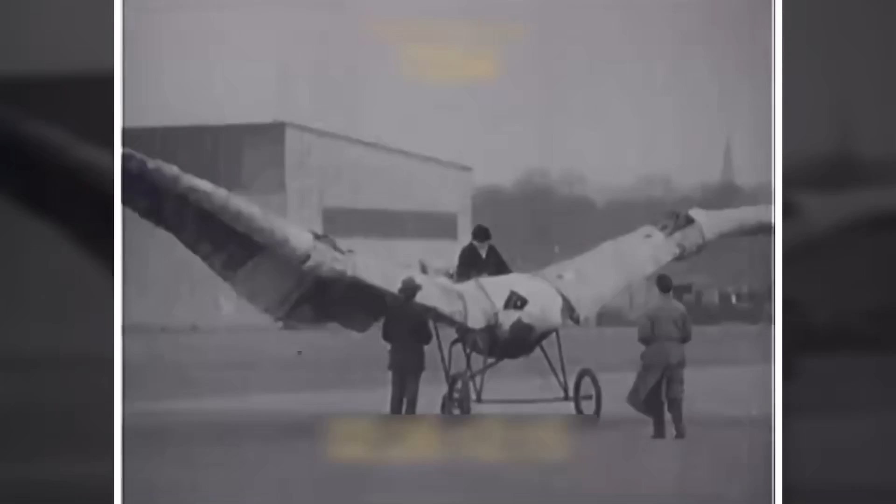However, by observing nature, specifically birds, along with many studies and a lot of trial and error in aviation, humans were able to understand exactly how something could stay in the air flying. In simple terms, airplanes fly because of the shape of their wings, the so-called wing profile. The upper part has a curvature and the lower part is less curved.

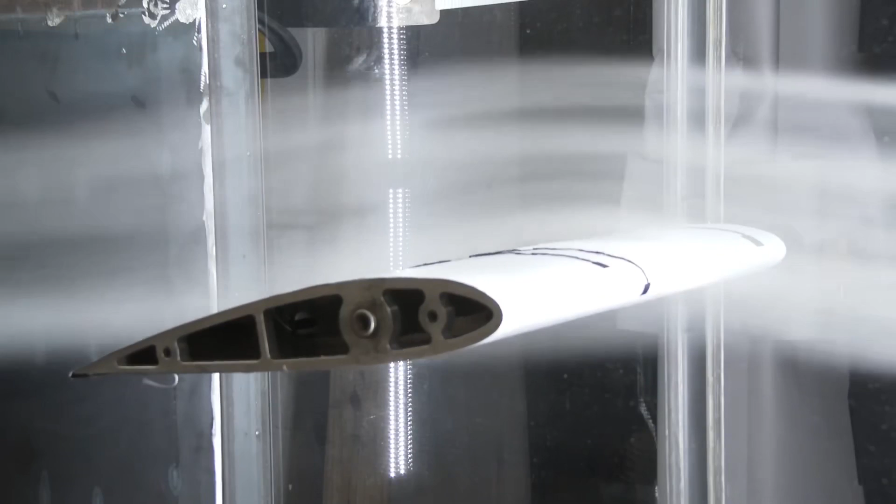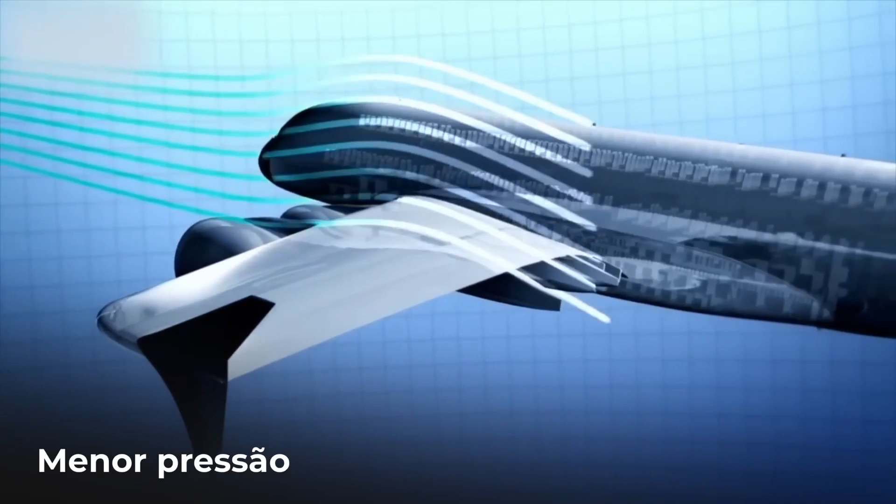This asymmetry causes the airflow over the upper part of the wing to travel a greater distance, resulting in a higher airspeed in that region. This higher speed creates a lower pressure zone on the top of the wing compared to the air passing underneath the wing, which moves at a lower speed and higher pressure. And it is precisely this difference in pressure between the upper and lower parts that results in the generation of an upward force, which pushes the wing, generating the so-called lift force, which keeps the airplane in flight.

Not only is the wing profile important, but also the angle of attack of the wing in relation to the airflow. The greater this angle, the greater the lift force the wing will produce. And the smaller this angle, the less lift force will be produced. And the third and final element that completes this equation is the speed of the airplane. Without speed, there is no way for a wing to produce lift. And that's why airplanes have engines and perform a long and fast run before taking off.

This moment allows a huge and considerable airflow to pass over the wing, producing lift while the airplane is still on the ground. You can observe this phenomenon happening during the takeoff run, since the wings of some airplanes flex slightly upward, and this effect is much more pronounced on the wings of the Boeing 787, which are made of composite material and because of that, flex considerably more at all times during flight. But why could bending be something fatal for any airplane?

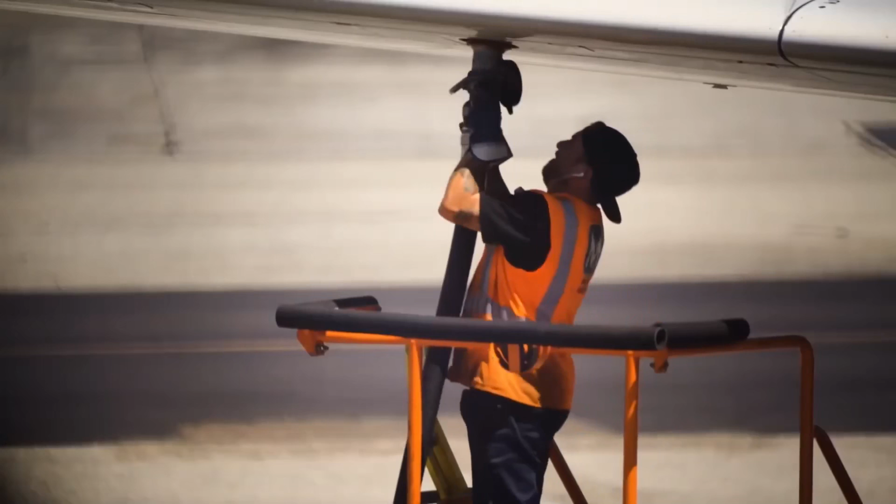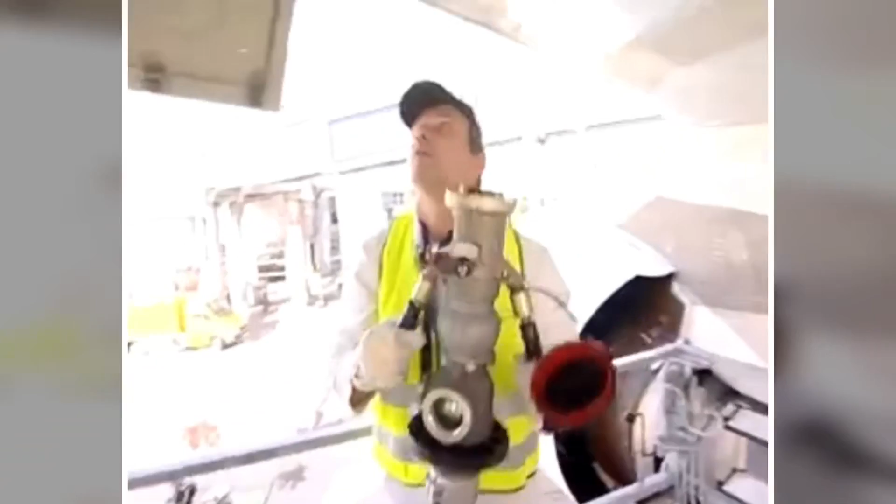Well, if you didn't know, the fuel of airplanes is stored in their wings in a principle of aerospace engineering known as a wet wing. In it, the airplane's fuel tank is integrated into the structure of the airplane's wings. In fact, the wing itself is the airplane's fuel tank. This configuration is a complex engineering choice that involves aerodynamic structure, safety, and performance. It eliminates extra fuel tanks, which would otherwise add significant weight and reduce the airplane's efficiency.

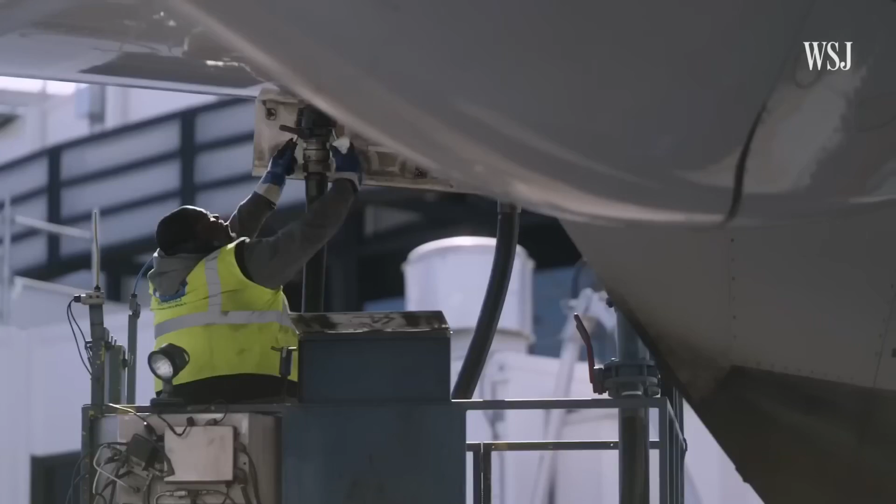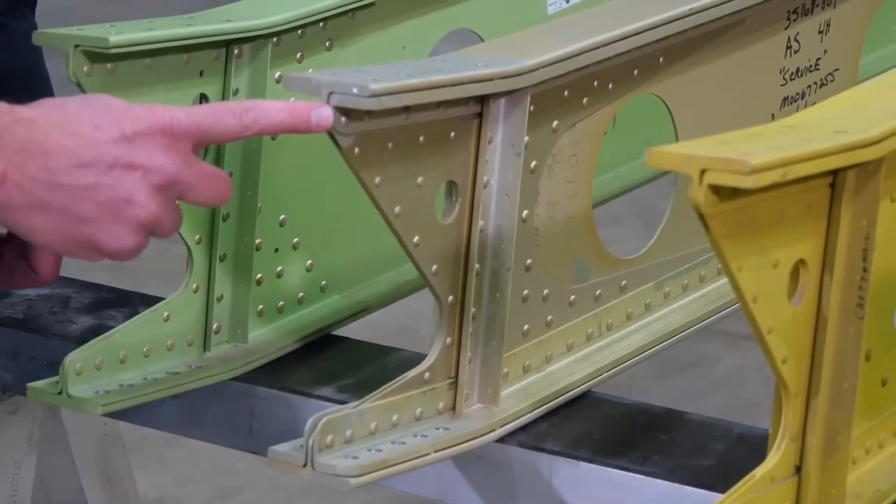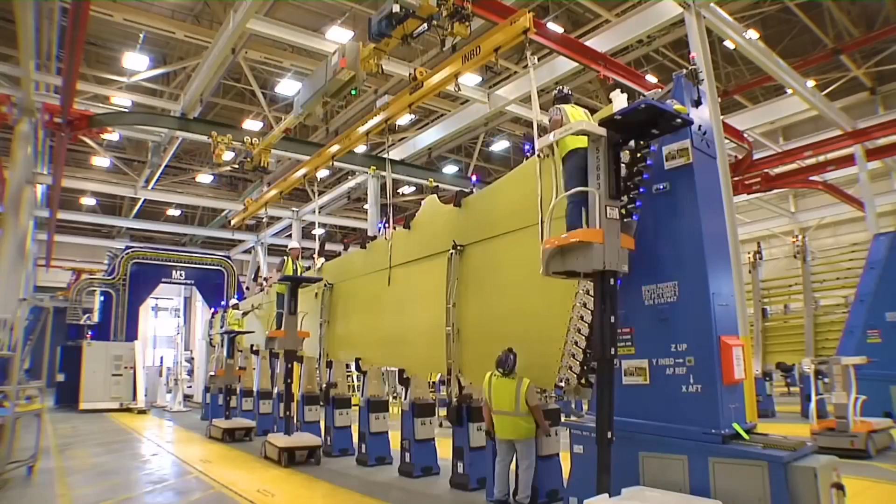By nature, airplane wings are made of two main components. The spars are the main structural elements of an airplane wing. They function like beams that extend from the root of the wing to the tip, arranged longitudinally. Their function is to receive most of the aerodynamic forces generated by the wing and transmit them to the aircraft's fuselage, being essential for supporting the flight loads and the weight of the wing.

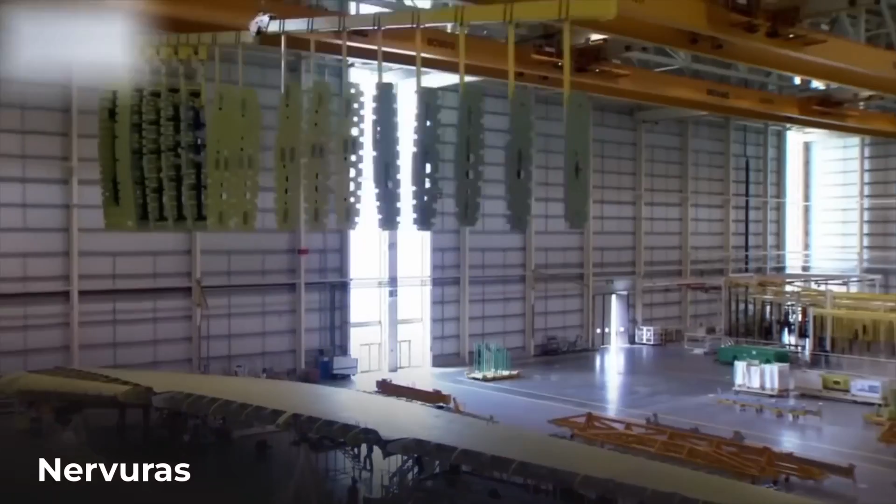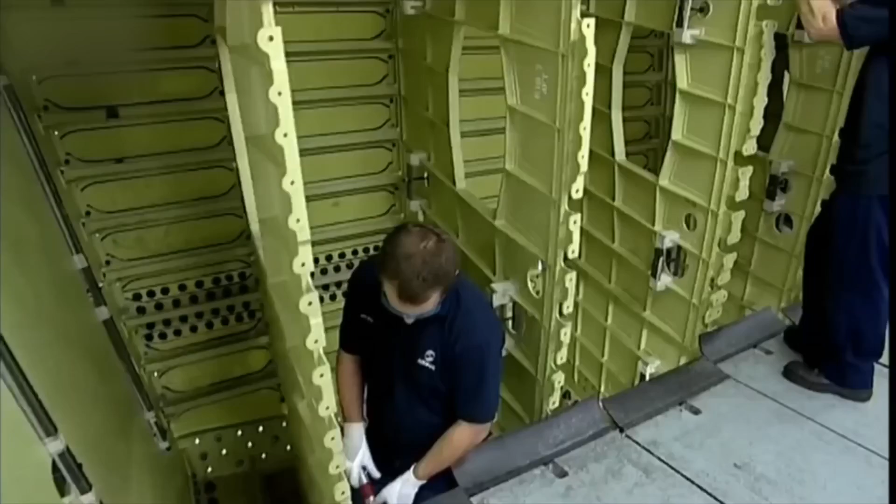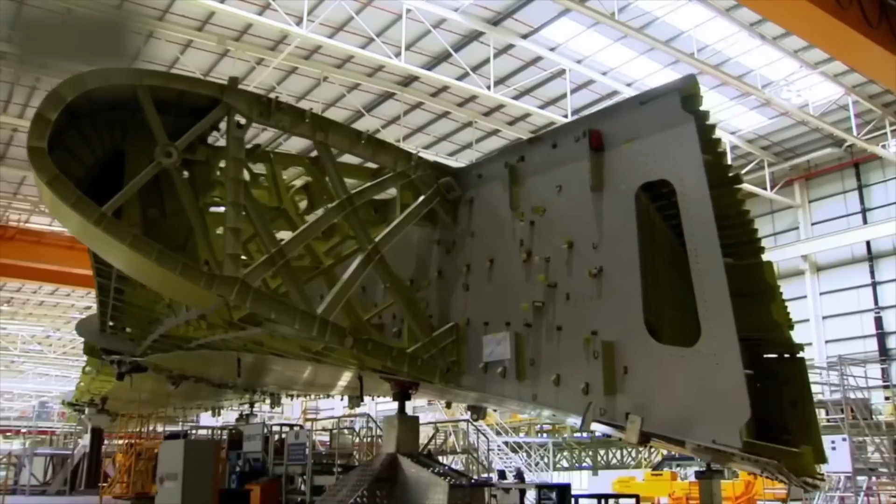And the ribs, which are transverse structural elements that transmit the loads from the wing covering to the spars, maintaining the aerodynamic profile and the shape of the wing. In other words, it's the ribs that give the wing that curved shape, which generates lift. And given the way these two components are arranged, the wing ends up being hollow by nature. Then some bright mind thought, if it's hollow, it can serve as a fuel tank. It sounds simple, but it changed the aviation industry completely.

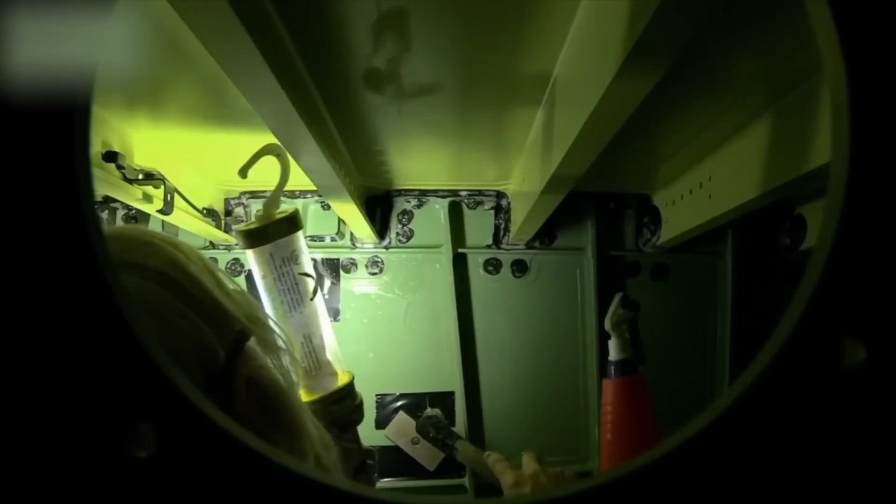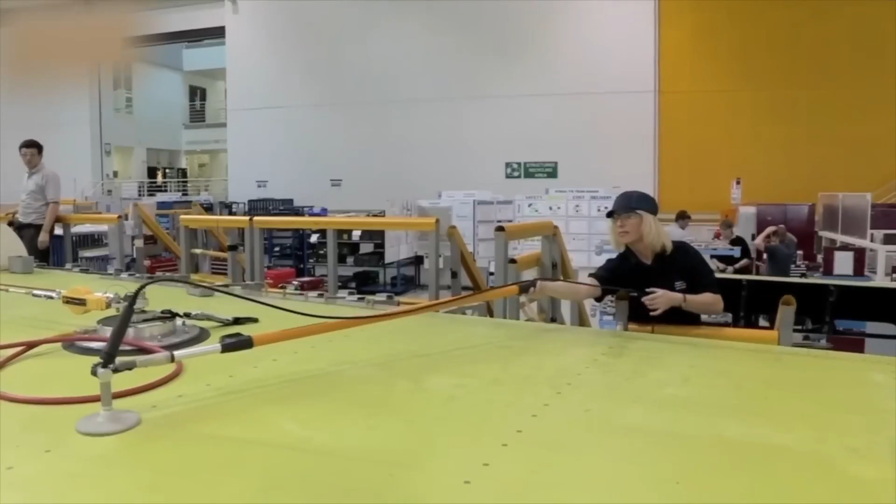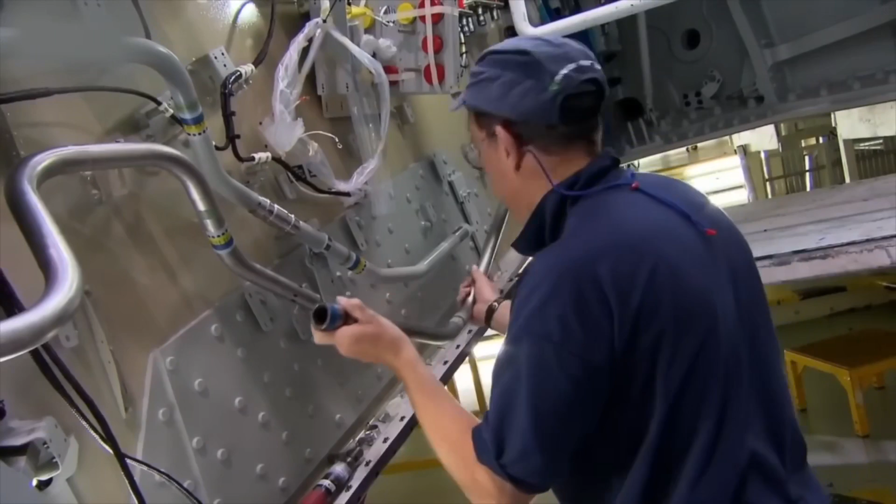And studies proved that putting fuel in the wings would improve the plane's stability. It would improve the overall structural efficiency by counterbalancing the lift generated by the wings and the weight of the fuselage. It would reduce the complexity of the aircraft's fuel system, since the fuel can reach the engine essentially by gravity. It would improve passenger safety by placing the fuel away from the passengers. But how exactly can fuel in the wings be beneficial?

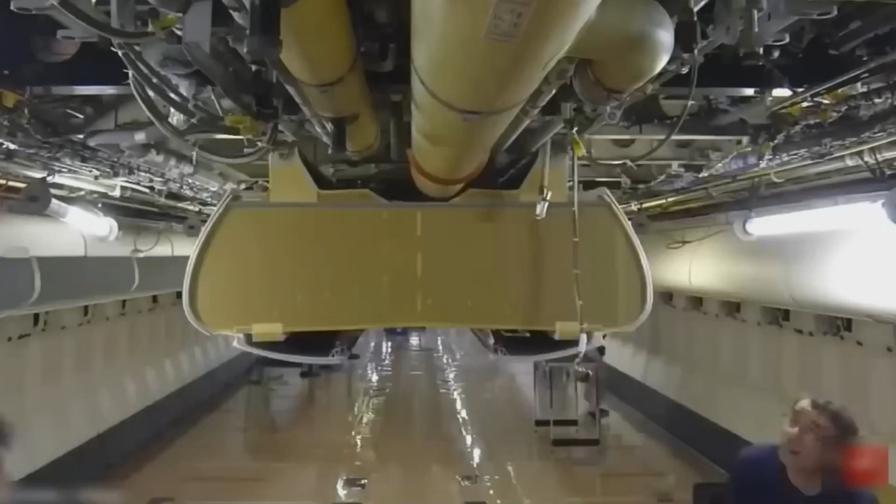The main reason airplanes carry fuel in the wings is because of weight and balance issues. All airplane cargo, including passenger weight and carry-on luggage, is carried in the fuselage. Checked baggage in the cargo hold, onboard food, and other paid cargo are also stored in the hold. This concentrates all the weight in the airplane's fuselage, creating great tension and structural stress on the wings during flight.

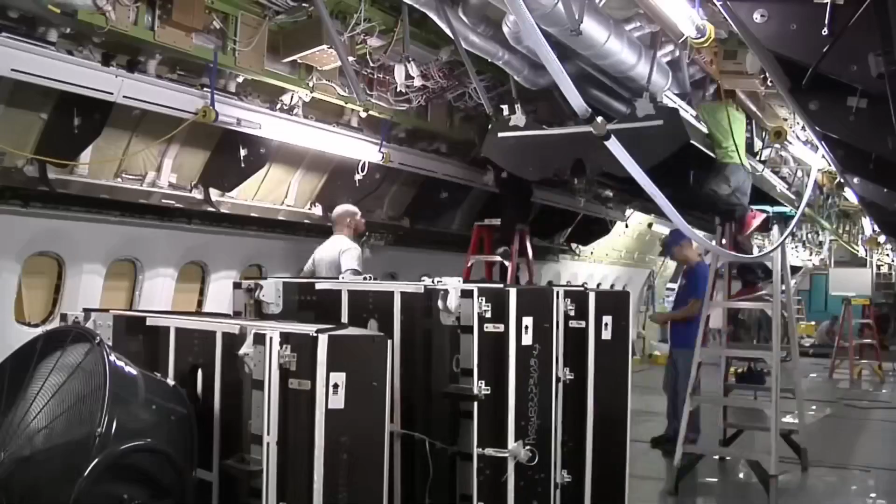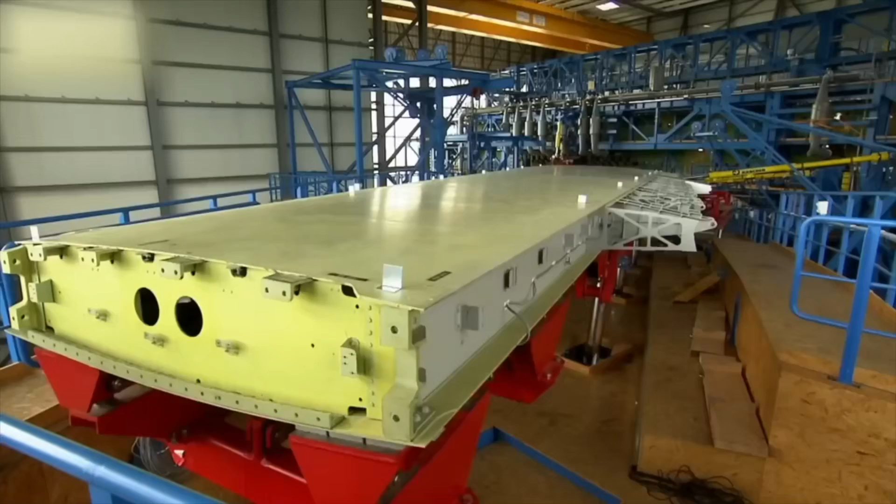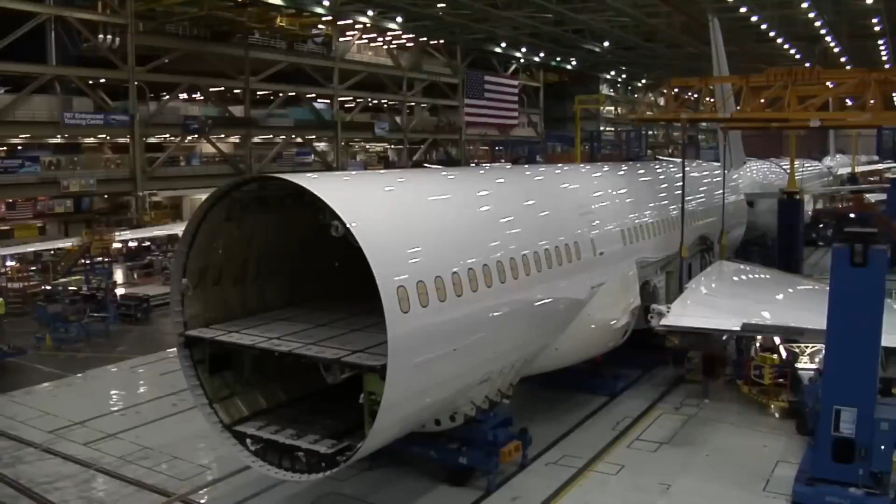What if there were no way to counterbalance this weight imbalance? That is, the dense and heavy fuselage and the empty, hollow wings. What would happen is that the fuselage would be exerting a great downward force because of its enormous weight. Meanwhile, the empty and hollow wings would be pulled upward because of the lift force they generate, creating a great upward flexing of the wings, resulting in early structural fatigue in the area where the wings are attached to the fuselage, a region called the wing root.

In addition to plastic deformations, which is when the deformation is permanent, and finally the breaking of the wing in mid-flight, since the wing would flex far beyond the structural limits for which it was designed. Additionally, turning would be very difficult.

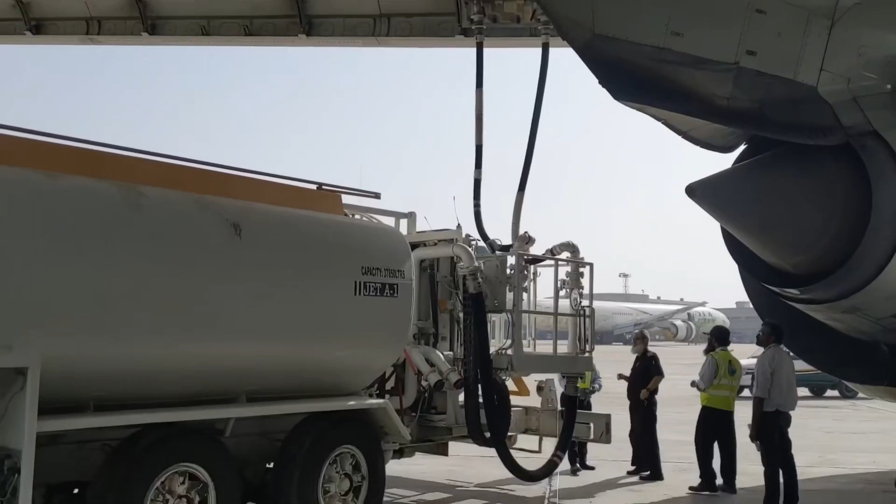Fuel is one of the heaviest components in an airplane. On some long-distance flights, fuel can account for up to a third of the airplane's gross weight. In others, it can reach almost 50% of the airplane's gross weight. For example, the world's longest non-stop flight from New York to Singapore, which covers a distance of about 15,349 kilometers, is completed in 19 hours of flight by the Airbus A350 ultra-long range. It requires the aircraft to carry between 110 and 120 tons of fuel. That amounts to around 165,000 liters of fuel.

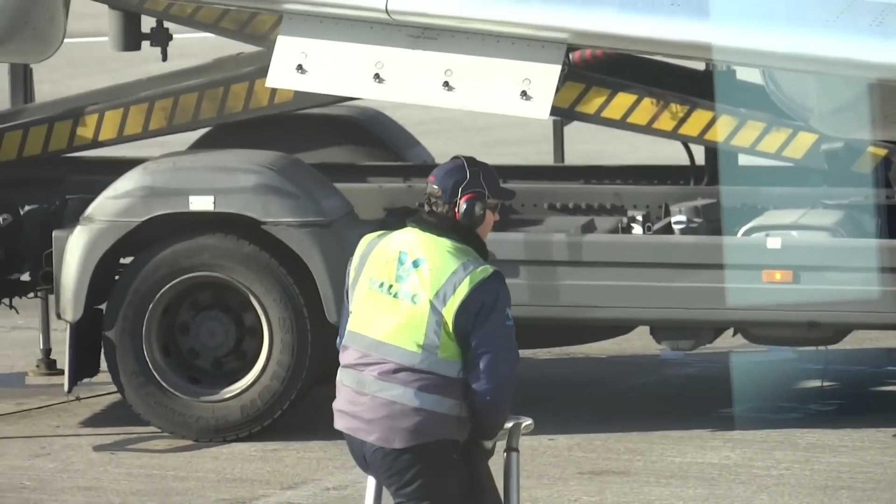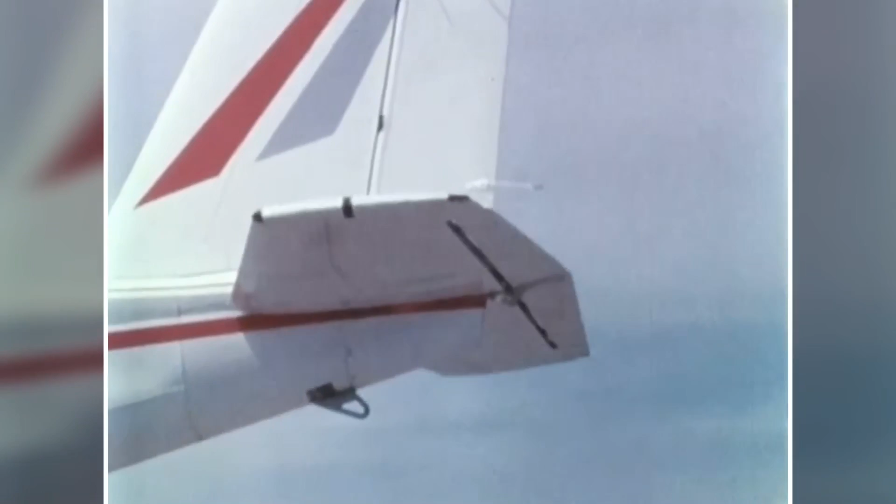Since the aircraft has an operational empty weight of about 135 tons, that means the fuel represents 89% of the aircraft's operational empty weight. To distribute this weight more appropriately, part of the fuel is placed in the wings and another part goes into the central tank, which is located in the belly of the plane. Thus, the wings filled with fuel distribute the weight better and more evenly over the aircraft, increasing the rigidity of the wings, contributing to greater stability in flight and reducing the phenomenon of flutter, which is a dangerous vibration or oscillation that occurs in the wings under certain conditions and can lead to their failure.

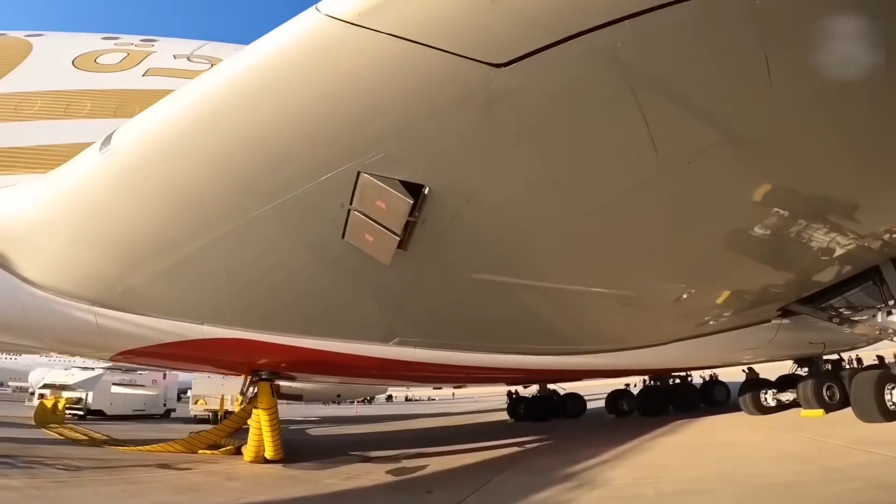This issue of more even distribution of fuel weight in an airplane is so important that in some aircraft, such as the Airbus A380 or the Boeing 747-8, fuel can even be allocated in the aircraft's horizontal stabilizers to better adjust the center of gravity during long-distance flights and provide greater stability to the plane.

However, fuel consumption in airplanes occurs as follows. When there is fuel in the central tank, which is located in the belly of the plane, as well as in the wings, the fuel from the central tank is consumed first, and only after that is the fuel from the wings used. This reduces structural stress at the wing root by lowering fuselage weight as the central tank fuel is used. Only then is the wing fuel used. If this sequence is not followed, and if you start with the wings, the fuselage will become so heavy and the wings will flex upward so much that they could break in mid-flight.

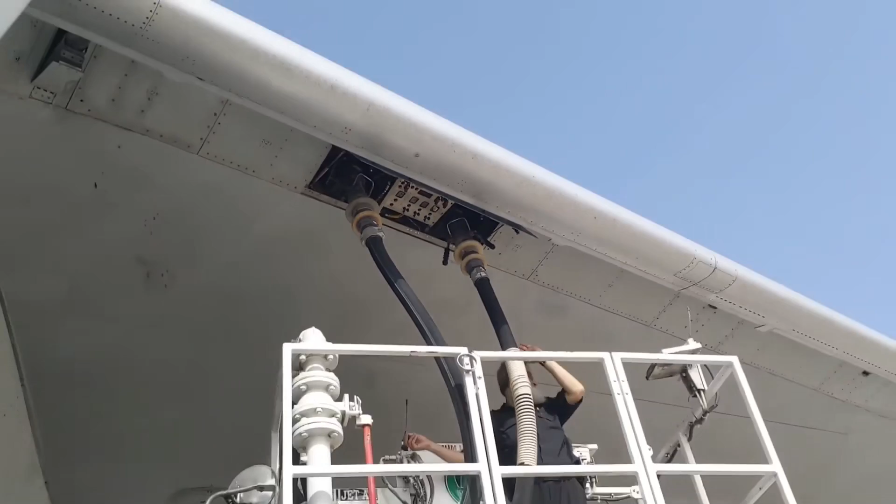However, putting fuel in the wings creates two major problems for airplanes. The first is that the plane can no longer land with the same weight it took off with. In other words, the maximum takeoff weight is higher and exceeds the maximum landing weight. That's why, in emergency situations right after takeoff, the plane has to circle several times or even dump some of its fuel before it can land safely. To avoid damage to the wing root and structure in general, because they're full of fuel. To avoid overloading the brakes and to prevent increasing the distance needed to stop safely, which could lead to accidents. Another problem with putting fuel in the wings is when making turns.

Airplanes carry absurd amounts of fuel to make flights. For example, a Boeing 737 Next Generation usually carries around 4,876 liters of fuel. That means 3.9 tons of fuel in each wing, totaling 7.8 in both wings. In addition to the 16,273 liters of fuel, which is about 13 tons in the center tank. When part of that fuel has already been consumed, especially the fuel located in the wings, making turns could be extremely dangerous for the plane. That's because when making turns, tons of fuel would shift position, dangerously altering the aircraft's balance, thus the center of gravity.

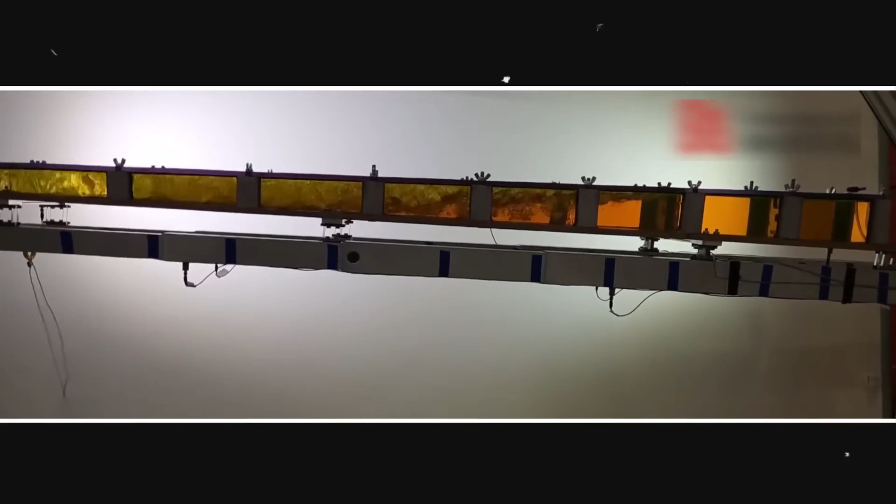There would be dozens of tons of fuel weight shifting position every time a turn was initiated. This phenomenon, which is known as fuel sloshing or fuel oscillation, is more pronounced in partially filled tanks. And it can be triggered by other factors, not just by making turns. It can also happen during turbulence, acceleration, or deceleration.

Besides the main problem of fuel sloshing being the alteration of the center of gravity, it could also induce vibrations or dynamic instabilities. Repetitive fuel movement can create oscillating forces that match the aircraft structure's natural frequencies. And if the frequencies of both coincide and amplify each other, vibrations can occur, making the flight extremely uncomfortable.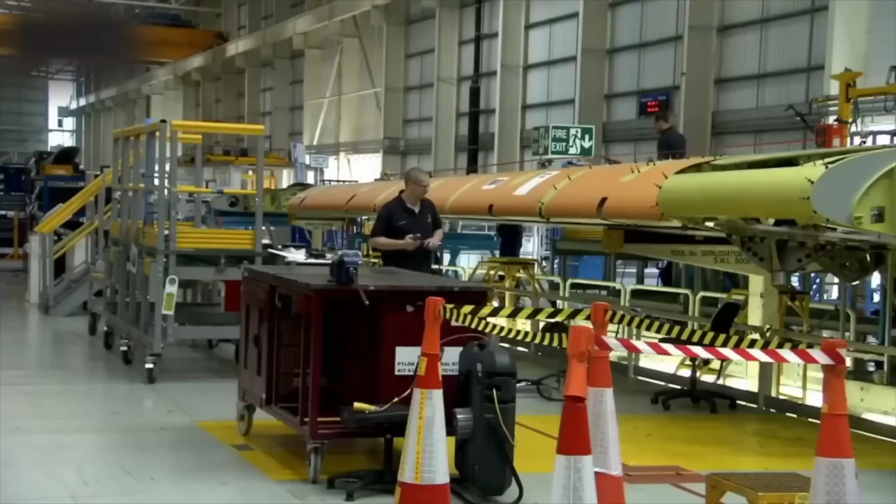Another problem with the movement of fuel is the exertion of considerable forces on the internal walls of the wing, especially in large aircraft. These tons of fuel, moving uncontrollably, could deform or even cause the rupture of the internal walls of the fuel tank, leading to a major leak in mid-flight right after the plane has started a turn or is facing turbulence.

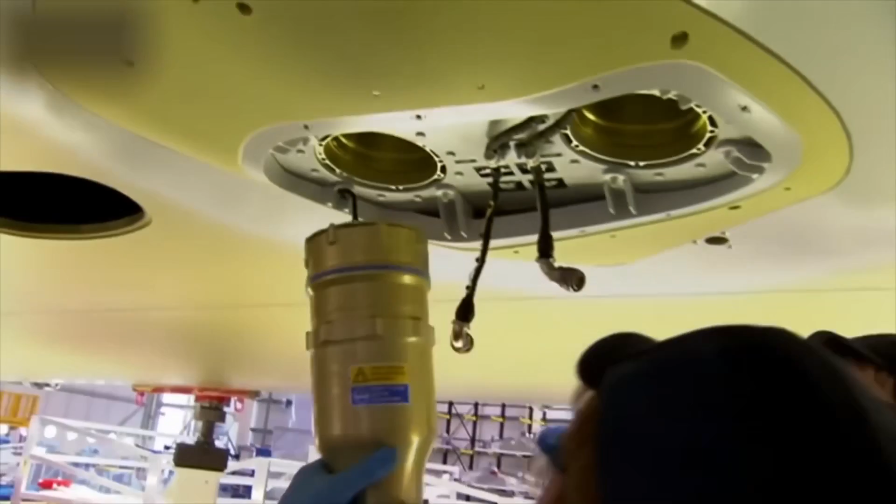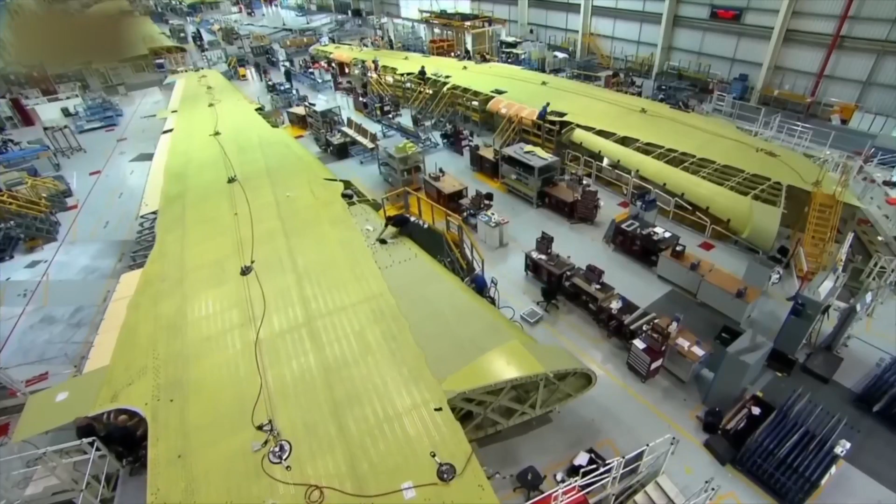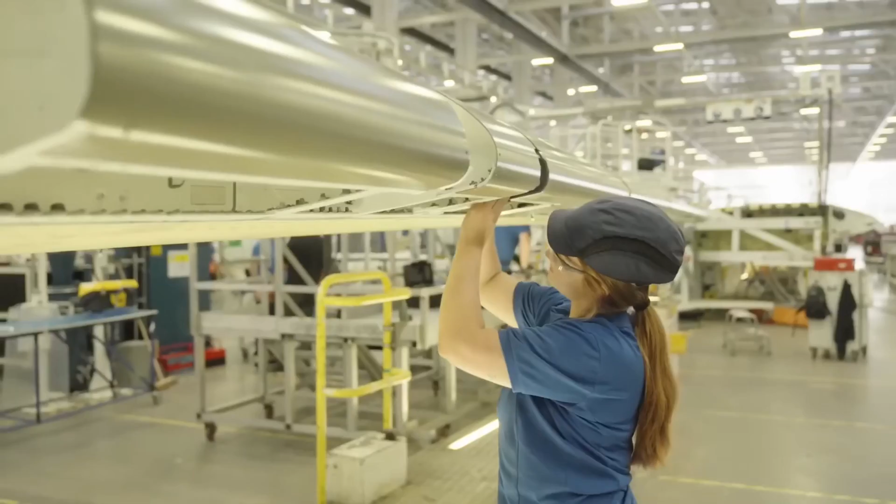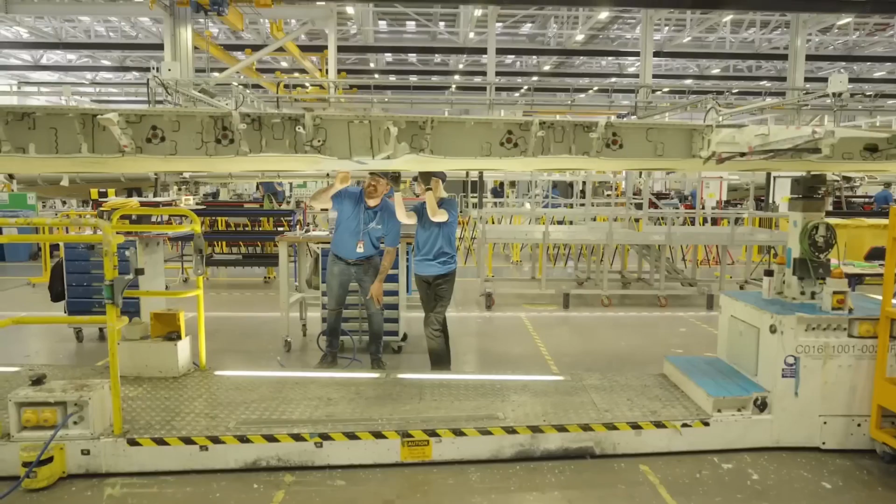This movement could also accelerate fatigue in the materials, like the aluminum sheets that make up the wings, in bolts and rivets, creating stress points that would lead to micro cracks and deformations, potentially resulting in micro and macro fuel leaks. In addition to damage to various sensitive systems inside the tanks, such as fuel pumps, pipelines, and several sensors. In other words, without an adequate engineering solution, storing fuel in airplane wings could be an imminent tragedy.

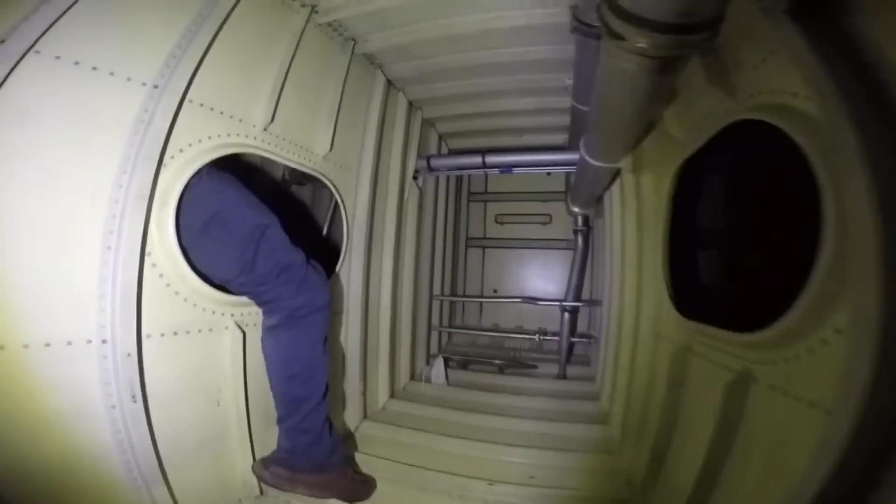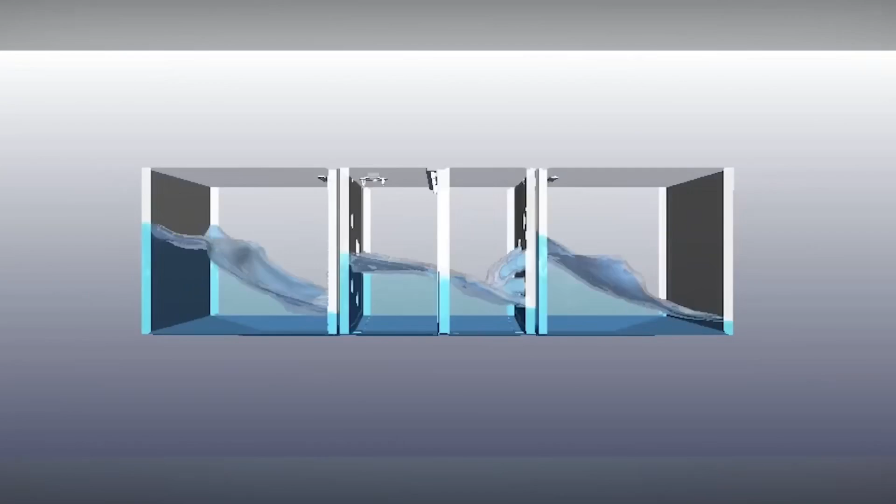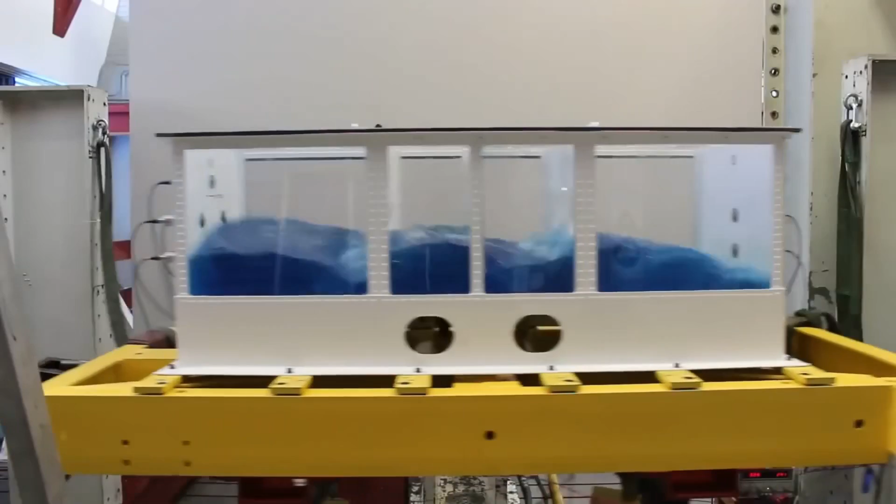How do airplanes avoid this in practice? Well, the engineering solution to this problem is to divide and separate the fuel into smaller compartments using walls, which are called baffles. These baffles create sections inside the tank and break up the free flow of fuel movement, turning large portions of fuel into smaller portions that can move even less. This way, the baffles prevent the fuel from moving irregularly and changing the airplane's center of gravity.

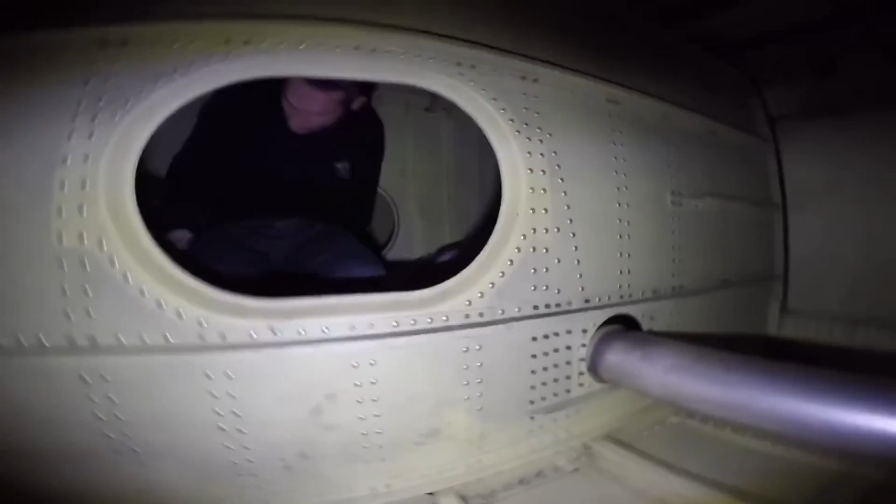Besides preventing changes to the center of gravity, this division also concentrates the fuel and prevents the fuel pumps from running out of fuel, even when the fuel level is low or when the airplane is making sharper turns, which is extremely important to keep the engines running properly.

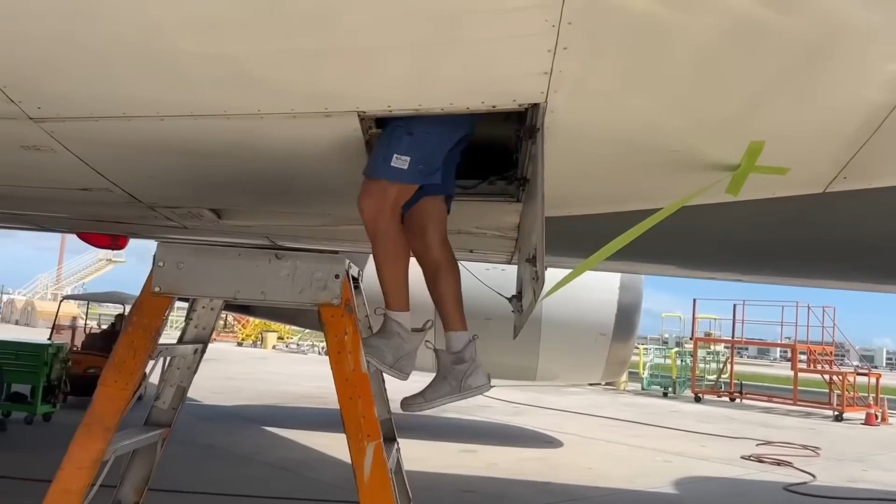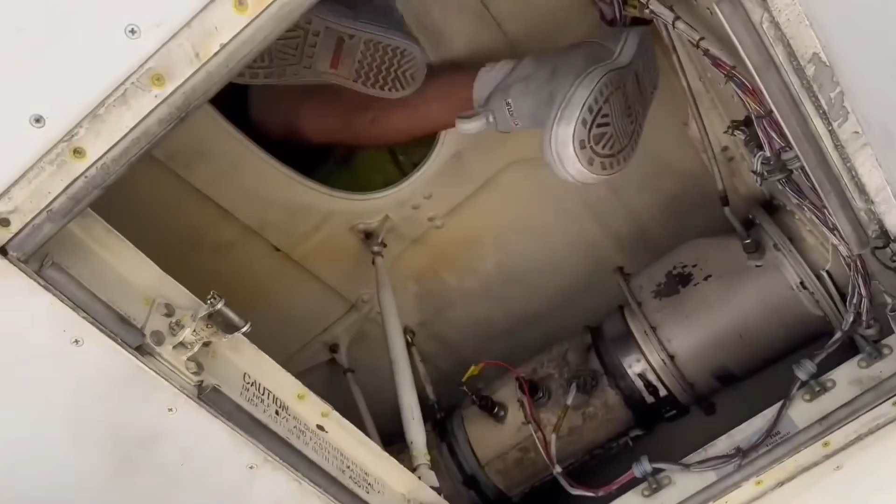The fuel tanks of large planes like the Boeing 777, A350 or 747 are large enough for several people to walk inside easily, and to allow mechanics to inspect them, but also to prevent the fuel from moving around excessively. These baffles have openings through which mechanics can pass to access other parts for maintenance. These openings also allow the fuel to move from one compartment to another, which is also extremely important.

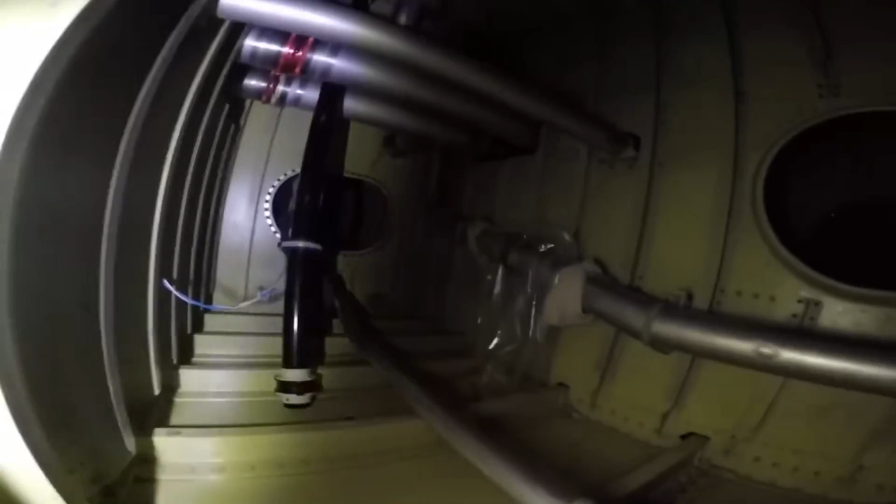And every rivet, screw, nut, and the entire internal structure of the tank must be sealed to prevent fuel from leaking or seeping around these components, and the sealant for waterproofing it must allow the aluminum to expand and contract due to rapid temperature changes, and it must maintain its sealing properties when submerged in fuel and when left empty for long periods of time.

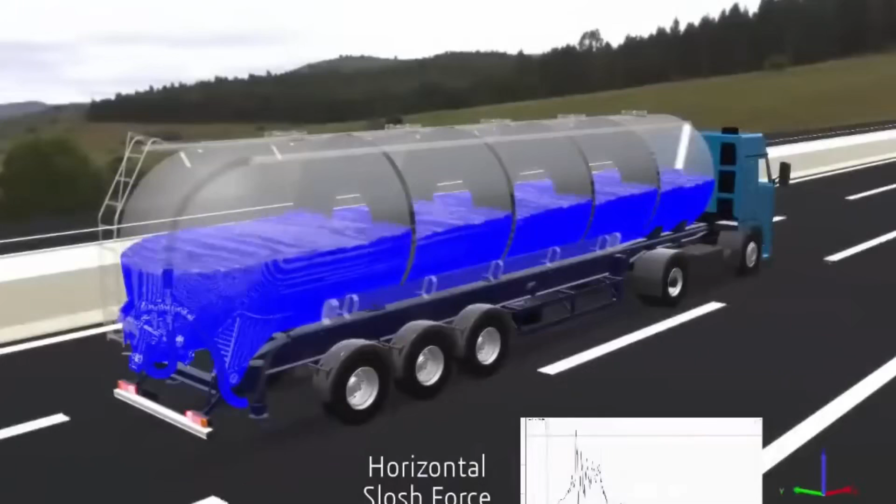The phenomenon of fuel sloshing and the use of baffles is also taken very seriously in tanker trucks that transport liquids like fuels. Since without the baffles, a sudden acceleration, a hard brake, or a sharp turn would be enough for the inertia of the liquid to make the truck lose control or even tip over. Especially because the truck is never completely full and the movement will be much more dangerous during sudden stops, since the liquid can come all at once and damage or even completely rupture the tank.

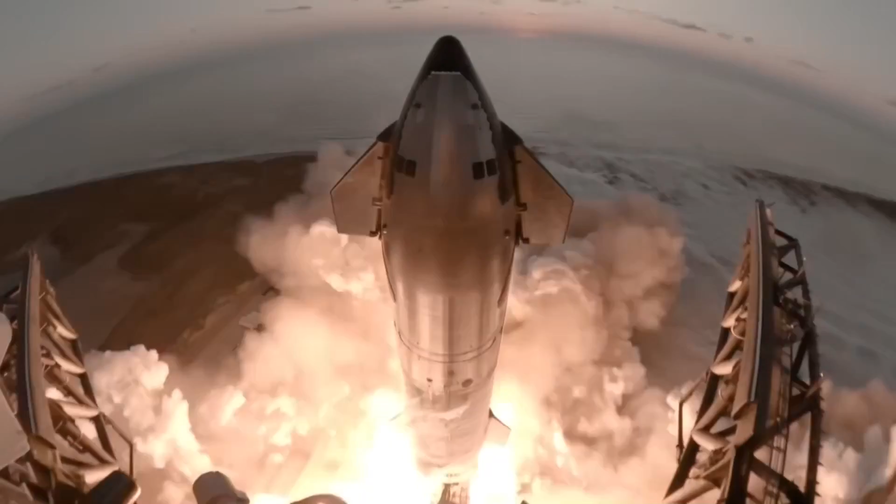Fuel sloshing is also a concern in rockets due to the enormous amounts of fuel they carry, in missiles powered by liquid fuels, and in several other vehicles that experience high G-forces, like Formula One cars, which employ clever designs to address these movements.